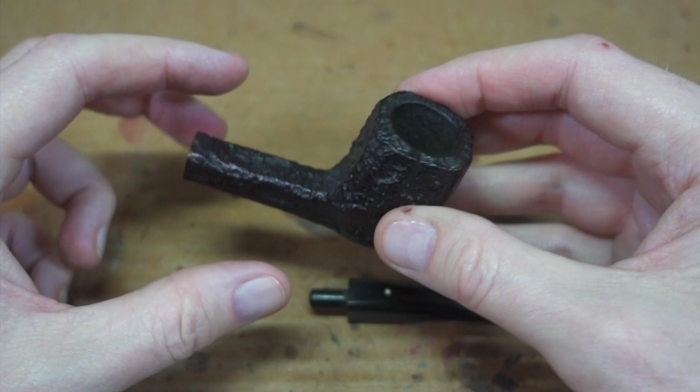So the owner of this pipe wants to make it look the same way it did when it first was produced. And that requires something that Dunhill invariably incorporated into their execution at the time this pipe was made. It has since changed, but in the early ones it is a dead giveaway if it's not there that the stem is a replacement. And what I'm talking about is this 45-degree angle at the base of the tenon where it meets the shank or the stem face. That has to be 45 degrees and razor sharp on the top and the bottom of the little slope.

Now, modern pipe tools and most companies have a cutter that leaves a smoothly rounded radius. And then they just use a carbide insert and can cut them all day, not a problem. This came about for reasons I won't go into. It's just arcana for historians, but they had a type of machine there that would do this quickly and easily, and they don't even do it this way anymore. They stopped a few decades ago. But as many manufacturing quirks later become hurdles for collectors or repairmen and are used to identify legitimate specimens.

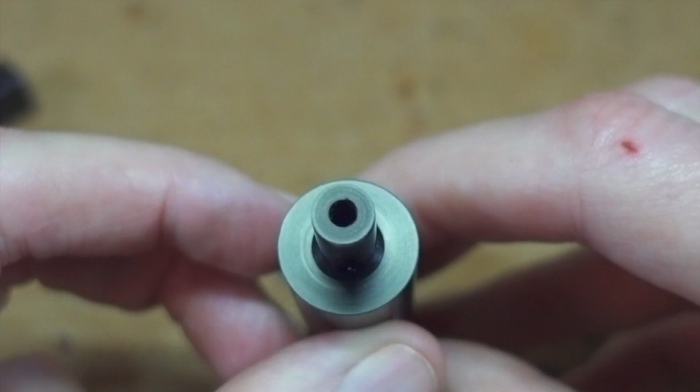It could be cars, knives, whatever. There's often telltales that experts look for to determine authenticity. So we're going to do what it takes to make this pipe look exactly the way it did on the day it was made, and that means we've got to get that. Well, obviously you can see I already have. This has been cut, ready to go, and all is well.

So that's the backstory. Here's the reason for the video: I get asked frequently how to make that 45-degree cut. It's not as simple as it looks using hobby or home machinery. And here we go. Normally, well, let's see. Let's start with a picture. What we're going to end up doing

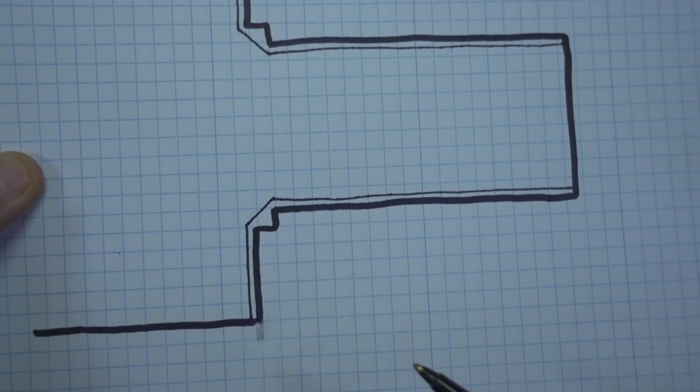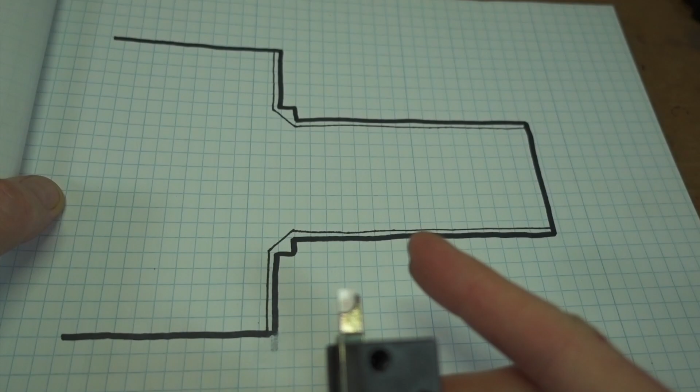is cutting where you see the heavy black line, cutting that to that much where there's like a stair step in this, and you can take as many passes as you like using a tool like this one. This is just a carbide insert, common type of thing, and you just make as many passes as necessary to get this within about 4/1000ths, 5/1000ths of an inch of where you want it, and leave that little step for reasons that'll be apparent here in just a second.

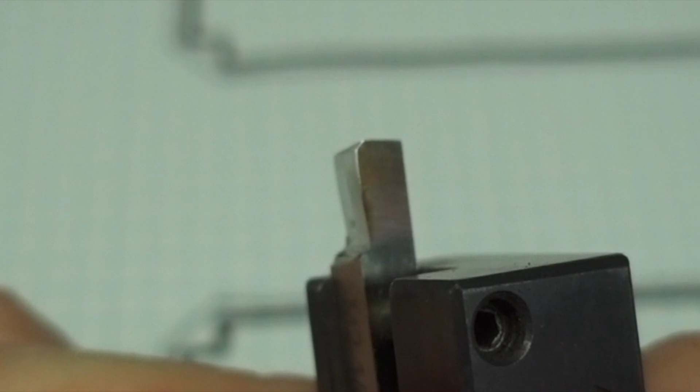And then you make a second shaving pass using a specialized tool. And by specialized, I mean you can't buy one of these, you must make one. And it's difficult to see that in real size wise, so here's a diagram of it. It's slightly exaggerated for clarity, but you get the idea. The arrows here indicate the contact area.

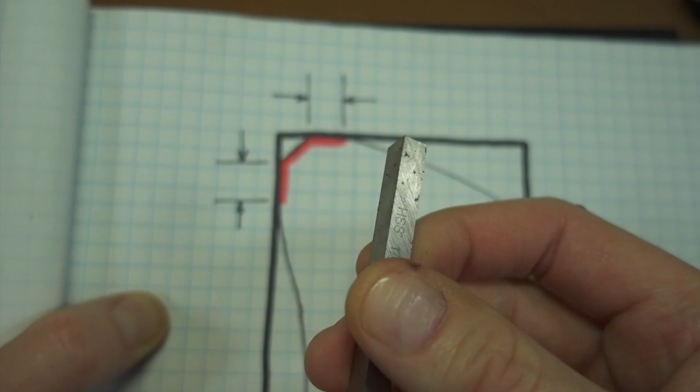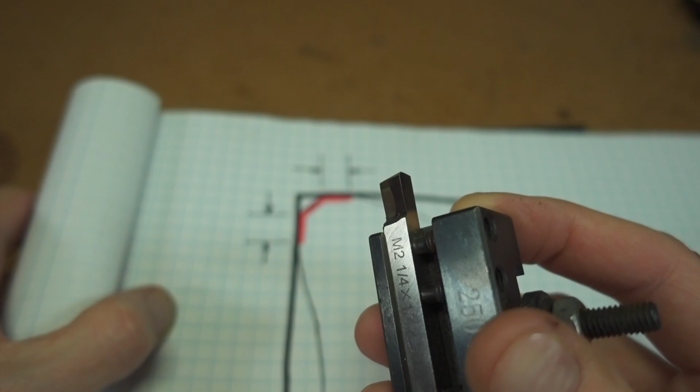And by the way, these cutting tools are sold, high-speed steel or tool steel, that are just that, what you hold in your hand, and you can modify the shape however you like. In this case, it's somewhat complex, and I can't get this thing to reflect just right here, but in any event, it's got to both be undercut on the top and the sides and have a radius here that basically continues right up to the edge, but not quite, of the 45-degree cut. And then the opposite on this side is it must be smoothly radiused away from a short distance level area here.

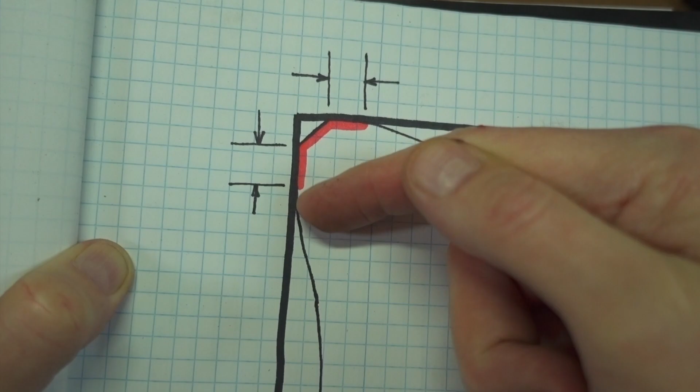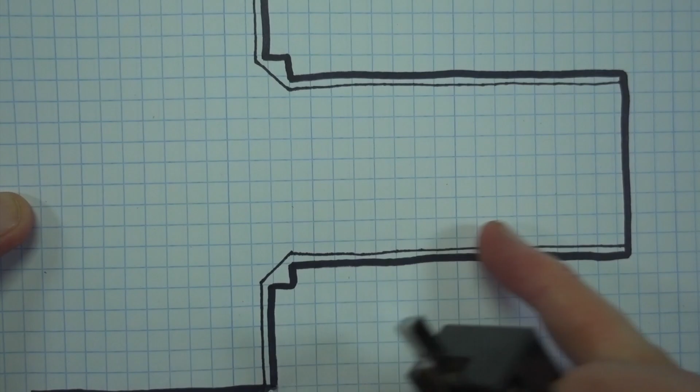And that is so that when you make this a sweep cut, this shaving cut, the only way I have found to do it, now there might be people who are capable of this by other methods, but the only way I've had success doing this is once you're down to the shape of the heavy lines here, you take this guy and go straight across, and you're just shaving it. You bump up into this little step here and it'll nip that right off. And then you get the face of the stem to cut smoothly by retracting it like so.

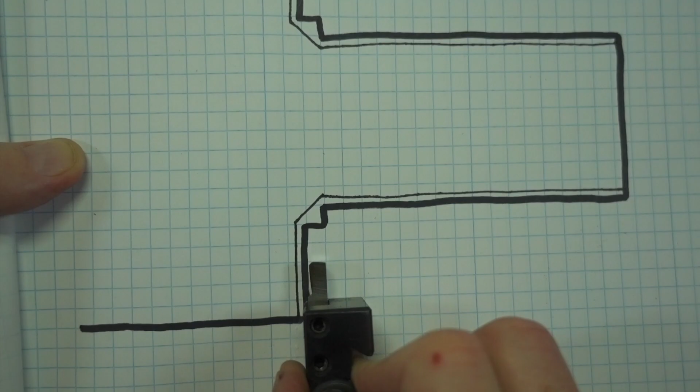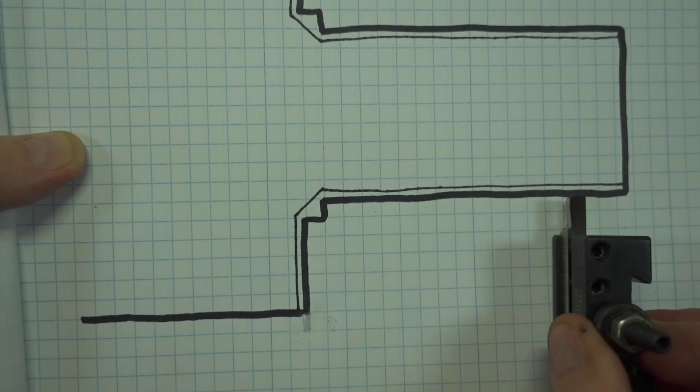Now I tried in early days to have a blade that just would fit down there, but I kept getting tear out and galling and stuff. I didn't get a smooth face here. Now, a large machine and the exact right RPM and yada yada, you probably could come up with a way to do that. I found it's easier, in my case anyway, to have this one tool that just went down the line. You bump this little step here.

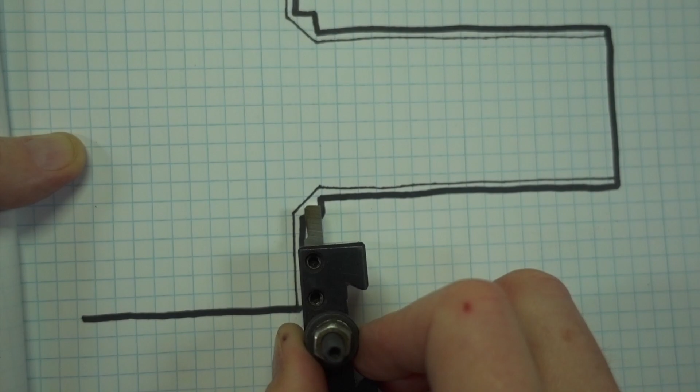Now, the reason for leaving that little extra step is so that you don't have to push or cut too deeply into the face, just a few thousandths, and then you retract it straight out like so. And that guarantees a perfect 90 degrees, of course, because it's rotating. So anyway, that is it.

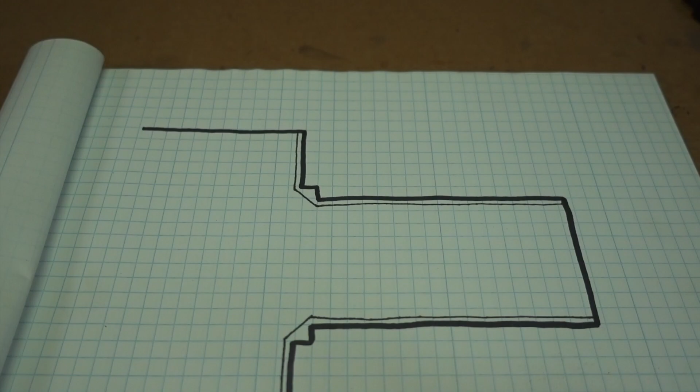There is no insert that I know of that has a 45-degree step or angle in it. And you obviously cannot grind your own carbide. Special ordering such a little tool would be possible, but it would cost you far more than normally. Inserts are quite inexpensive, just a few dollars each, but if you wanted custom made ones, it'd probably be a minimum order of however many dozen of the things, and you're only going to use a handful in your life. So this is the way to go.

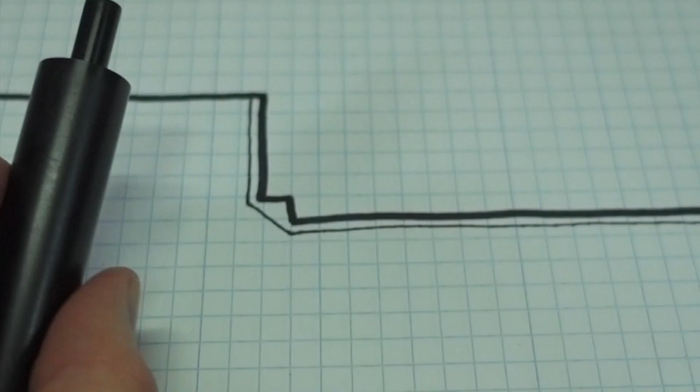Grinding this shape is really going to be your only challenge. If you do it on a stone style grinder, be very careful of overheating and continually cool as you're grinding it. I find it's much easier on a belt grinder of the right type because they run a lot cooler, and you can get the surface of the metal to be mirror smooth, which is necessary to get a shiny, smooth finish. If you could cut all the angles on this thing perfectly, but left grinding marks on it, it would not do the trick. You would then end up with a stem that was perfectly shaped, but had slight scratches in it, which wouldn't matter much on the tenon here. You could polish those out, but it would absolutely matter on the face of the stem.

There's no realistically good way physically possible to polish the face of this without messing up the very thing that you just worked so hard to create, that little 45-degree step. If you start polishing on this, that changes the base of where that little 45-degree slope is, and it becomes blurry, and that would be a giveaway that it's not authentic.

So anyway, that's it. We're not going to get into the shop and actually do stuff, because the way I do things is not the same as the way you do or anyone. Everybody's got their own method to achieving these things. So in this type of instance, it's just explaining how I do it, and you engineer it backwards to your own shop and requirements and so forth.

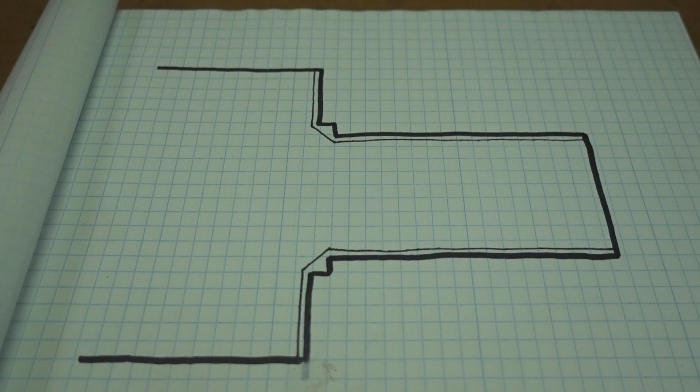And that's it. A final word, I did notice, this is totally unrelated, that in reviewing a couple of videos of my own, that advertising has become peppered throughout this stuff. And I just want to pass on, that has nothing to do with me. In fact, when I set up the channel, on the checklist of stuff, I specifically said no ads, none of that. Didn't want to go there. However, YouTube can do what it wants, and apparently they have decided, for whatever reason, with no explanation, I got no message or anything else, that they're going to be jamming ads on the beginning or the end of some of these videos for who knows what, nothing to do with pipes. But anyway, I just want you to know that was not a change of my personal policy or the earlier decision. So that is it.